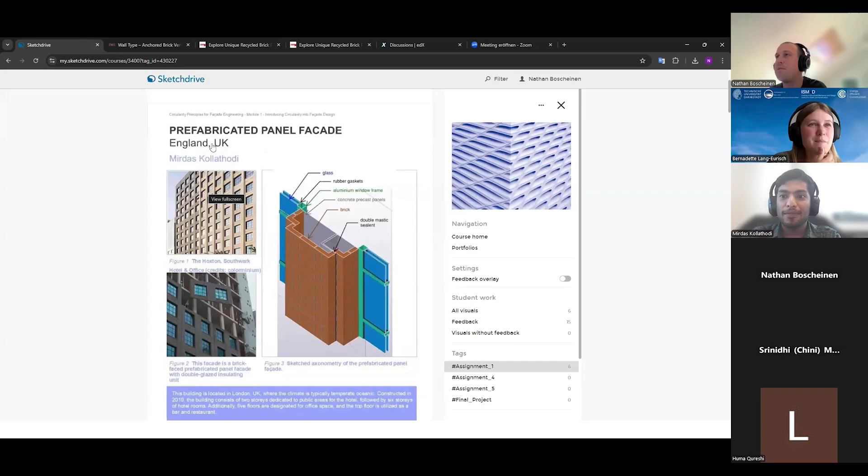This building is located in London, and I think Nathan already shown a good video from the Columinium website, the window contractors for this project. If anyone else would like to see the video, it's in the sketch drive as well, in the comments. It's pretty interesting.

Thank you, Mirdas, for your interesting prefabricated project. Of course, you don't need to share the details, but you can also share different drawings if you want to. I understand that sometimes we can't share everything that we would like to share.

I think it's very interesting because especially prefabricated modules can support circularity because of the potential for demountability, and they allow for controlled reuse. So you're not just recycling the small materials, not just the single brick, but maybe you can reuse the whole facade plate in a different project. This is quite interesting, but it depends on the future use for the new project and the quality of the modules. And of course, how are the modules mounted and connected to each other? Can you maybe share a little bit about that?

I'm sorry, I'm afraid I don't have permission for that. Okay, it's fair, then we're just going to talk a little bit about it. That's totally fine.

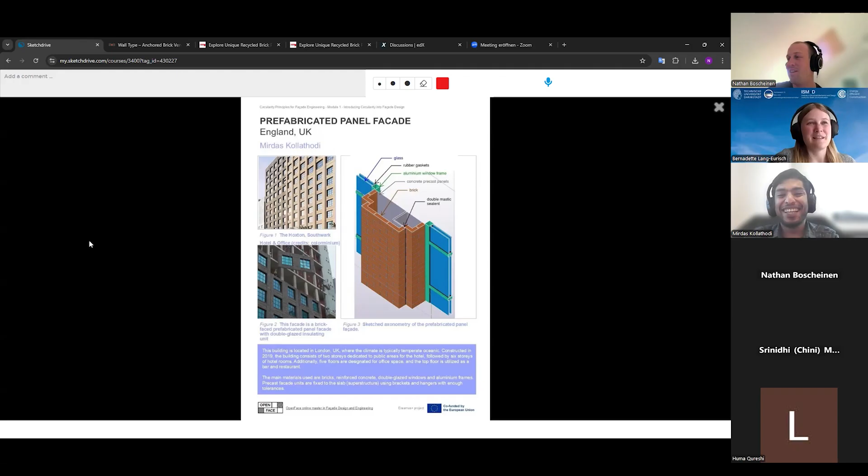Like I said, I think it's a very interesting project to see how the whole system can be reused. Just one thing that I noticed, I really like the project. With the brick, don't forget there's also mortar included, so if you want to reuse the brick, you need to probably detach it from the mortar. Just a slight note that I noticed.

I think I can add something to that. We already use this if the project is big and we are only showing one side of the brick, then we will cut the brick into two so we can use both sides. The whole brick we can cut into two and we use it.

Cool, like a brick slip system, would it be called, or something like this? Cool, they're quite big panels. Yeah, very heavy. Cool.

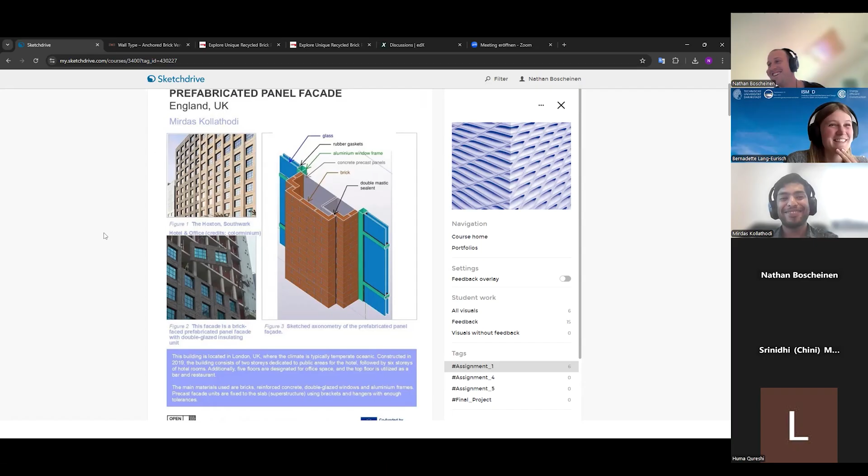Thank you, Mirdas. Nathan, did you have some comments or thoughts? I just said from a disassembly point of view, it's quite interesting as the whole panel with precast concrete is tricky, but as Bernadette said, when you have the full panel, you can reuse the whole panel, and it's relatively perfect. That was the only comment I had, and just how big the panels are is quite amazing.

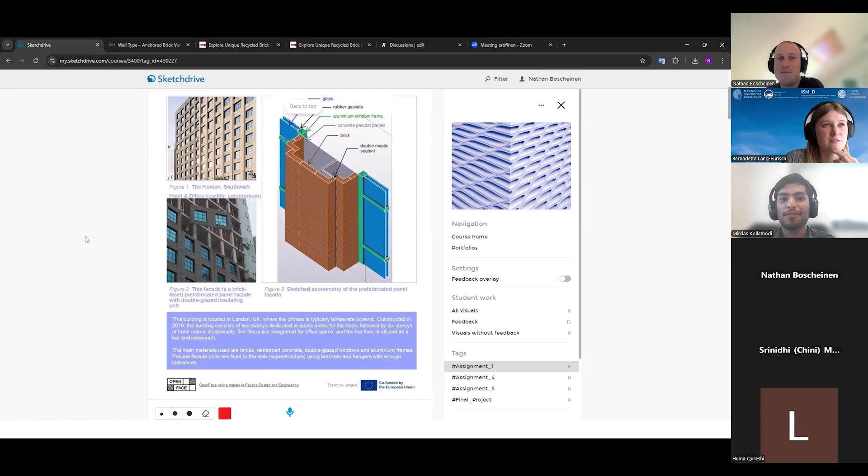And then maybe we can go into different business models, like renting a facade and things like that come up. But I think this is a video for later on, maybe I'm spoiling some information already. Then maybe move to the next project before I say too much.

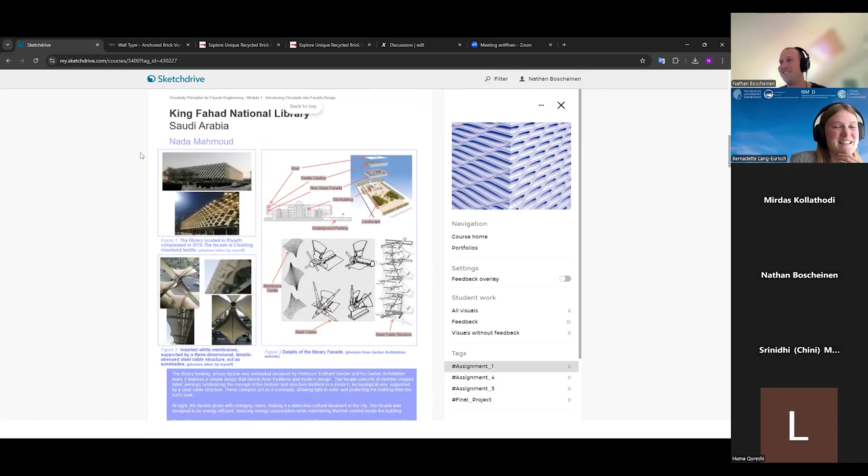But thank you again, nice project. Oh, and then another one, very interesting design. Nada Mahmoud, are you here? Maybe I can look into the names. I also can see them.

Nathan, do you want to maybe do a quick summary and then I can share some thoughts? Well, Nada has posted this relatively interesting building. It's pretty bespoke, in Saudi Arabia. It looks like from the drawing they've got the old building, the old heritage library in the center, and they've completely encapsulated the building within another building by the looks of things.

So it has an entire glass structure behind this textile facade. My only question to Nada was whether the textile was purely a sun shading element or if it had some ventilation function. I'm not sure if the glass facade behind is completely sealed with mechanical ventilation, or if it allows airflow through the building. I wasn't sure, but from an architectural point of view, it's a very interesting building.

Yeah, but I liked that you pointed out... oh, someone unmuted him or her. I was just thinking out loud, given that it's in Saudi Arabia and I grew up in the Middle East, I think it would be pretty unlikely that it would allow external ventilation, just given the climate. But probably the shading is a major benefit.

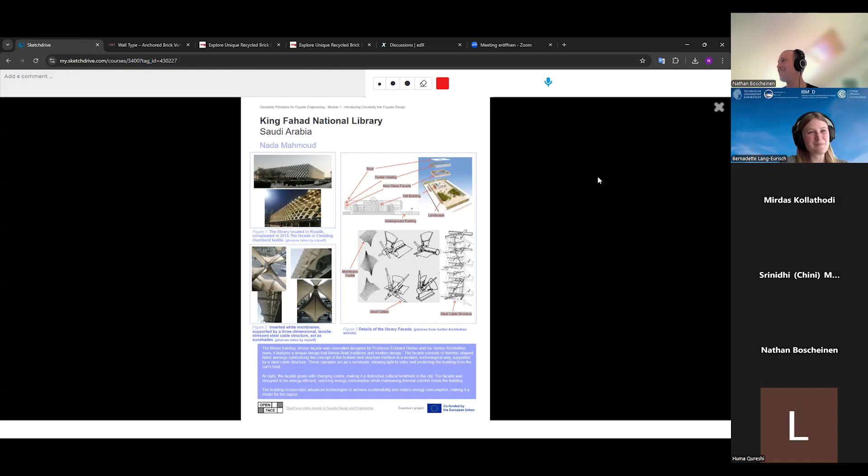Maybe Nada has the answers in her next assignments. Hopefully, yeah. We don't want to spoil anything, but you'll probably see this building again. I don't remember if there were any other questions in the comments. No, that was basically it, I think.

I wasn't too sure what the exact textile material was. I tried googling it quickly but didn't find an answer besides that it's textile. But textile can mean anything. Still, it was very interesting.

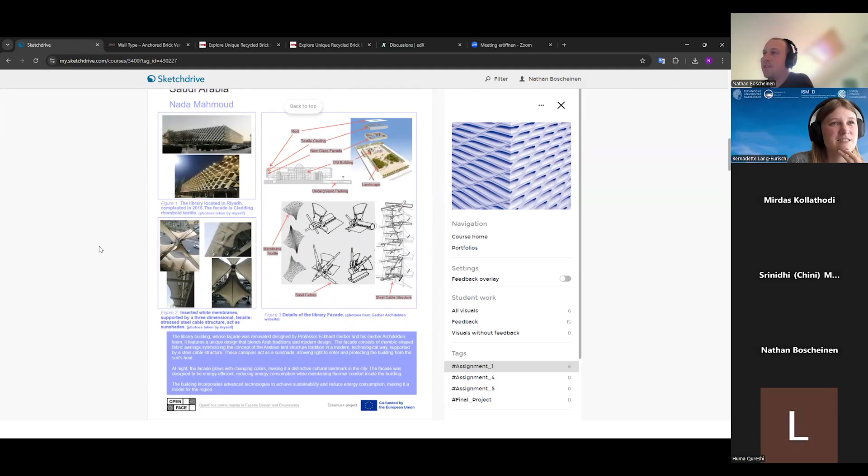I like that they haven't touched the old building and left it in there as well. Sometimes you don't need to replace the whole building, sometimes you can just build a building around the building. I think in module 4 we'll have an example about this concept, with Irving. I'm giving too many spoilers.

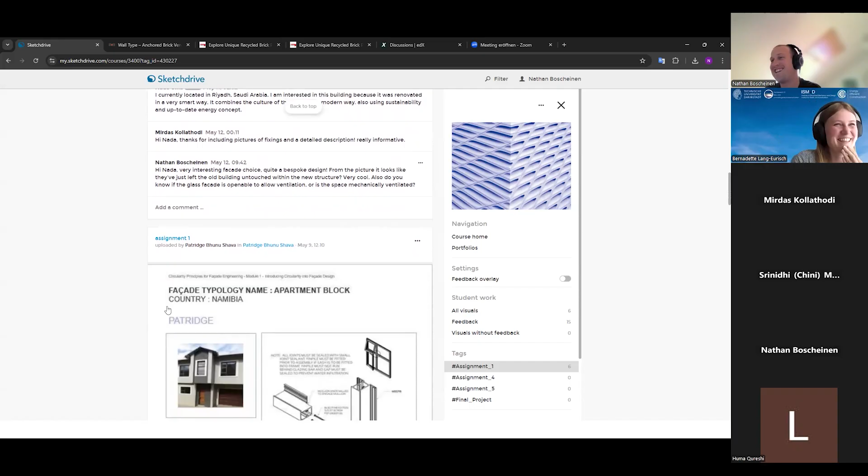Let's go to the next one. This next one was from Patridge in Namibia. Just gonna have a quick glance. I don't think he's present, so maybe we can talk about it again. I've also just realized the question I asked was relating to the cladding, but it's answered here, so I can ignore that question. In German we have a saying: if you can read, you have an advantage.

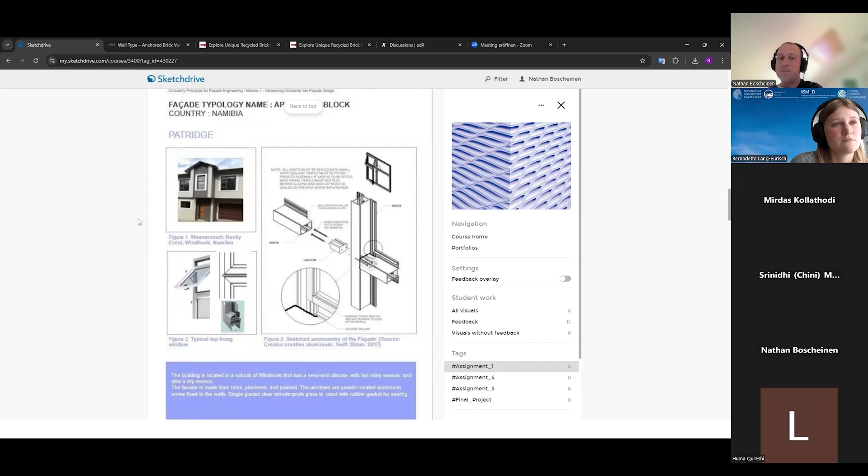Matteo had the question: are you aware of different materials that were added to this facade because of the semi-arid conditions or rainy seasons, that would differ from other similar constructions? I don't know, I'm interested to see the answer. I couldn't think of an answer myself. The only thing I thought was that the frame itself is not a thermally broken frame, which isn't the best for thermal performance, but maybe the issue of dew point and moisture isn't such an issue in a drier, warmer place than Germany. That was the only thing I could think of.

To be honest, I would have wished that Patridge would be here, because I have some questions, as it was a bit hard for me to read the text.

And I also had questions like which sealant was used, because depending on which sealant, is it recyclable or not recyclable? And also the question regarding... can you scroll down a little bit so I can see the question, or so the group can see the question again?

Of course, I can just speak for the European side. Yes, it depends on which material you use, and it depends on the durability of the material. If we're going into assessment tools like LCAs or material flow analysis, we also need to assess the time that this material can still provide its function in the facade. It totally depends on the outer circumstances. If you have a high humidity rate in the outer climate, your material will be different after 20 years than if you have a drier climate. So this is one thing I'm thinking of when I see a question like that - it depends on the time the material can still provide its function.

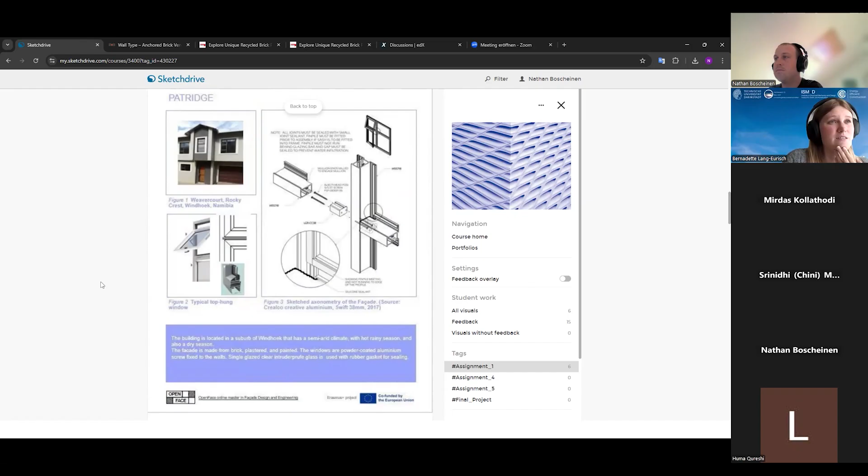And yeah, I'm sorry, I had a little bit of difficulty reading the text. But I will probably write a comment about that, and maybe Patridge can answer that in the assignment.

Cool, continuing on. I think you're here, yes? I am, yes - Chini, is it? Oh perfect, yeah it's Chini. Cool, if you feel like it, hi, you can talk about this project if you want to. Yeah, well, I'm partly disappointed I didn't put in a project that my company is working on, because I think that would make for a much better final project.

But I took the assignment of visiting a facade locally far too seriously, so I reached out to my friend who's the architect for this building and got a bunch of details, because I also don't know how a sketch would have done justice to this assignment. Anyway, it's a fairly typical storefront with aluminum and glass and gaskets, so it's pretty similar to the curtain wall that my company works on as well. It's thermally broken, so I wonder how that will affect the recyclability of the glass and the aluminum - will it just be separated, or will it just kind of burn off when the aluminum is re-smelted? I don't actually know the answer to that. I focused a lot on the second assignment on aluminum and glass, in terms of the challenges.

But yeah, I think this is interesting to me because I feel like it's already designed for disassembly. If you take out the gasket and you take out the glass, you can disassemble the whole frame. So I'm interested to see what other improvements can be made to the system.

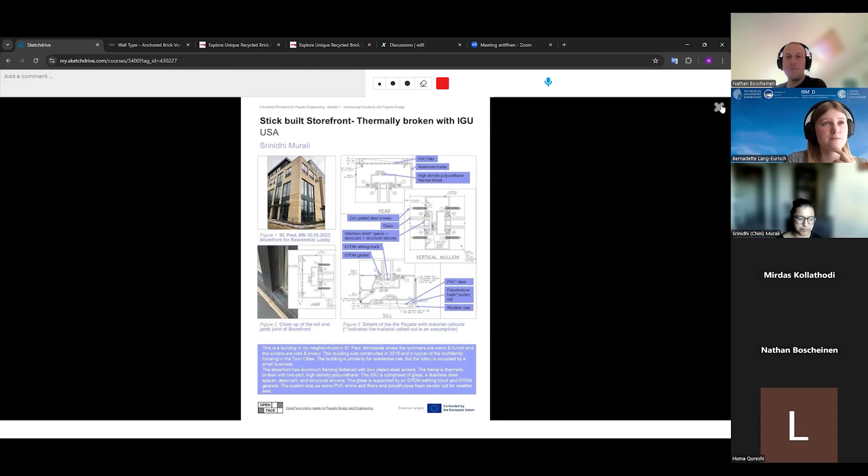Cool, any more questions? Doesn't look like it. But thank you for your submission.

I think there was a question about shading devices inside, which was answered on the inside. But we can continue on for time's sake.

This one was from Dónal. Here I had the same question like the one project before, something about the silicone sealing and how it's recyclable. It's just something that I'm always thinking about - oh, just use silicone to seal it off, but then the question is, can you recycle it? Is it possible? In theory it is possible to recycle silicone, but because silicone has so many different formulations, you need a very selective sorting process, and it's not really feasible to do. If you have a very big project where you can gather the same formulation of silicone, maybe it could be possible, but you'd still need to find someone who can recycle that for you. This is something I always see in designs like that, and I'm always thinking, how can you recycle it?

Now I think I talked a lot again. Donal, are you here? I don't think he is. This project is very similar to the example we were going to use for our template, but we changed it. We originally had the Glass Competence Center facade in TU Darmstadt as our facade, but we thought it was a bit trickier to explain, so it's nice that he presented it in a very nice drawing for us.

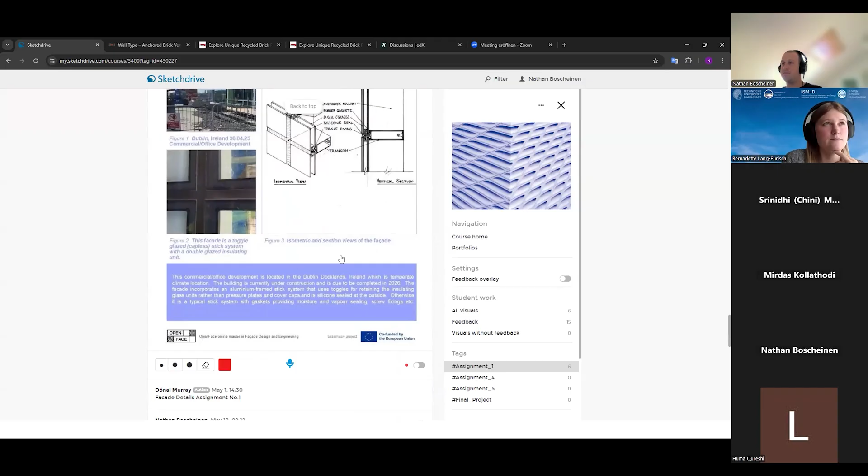I think we have one more from Matteo - the colorful one. I don't think Matteo is here either.

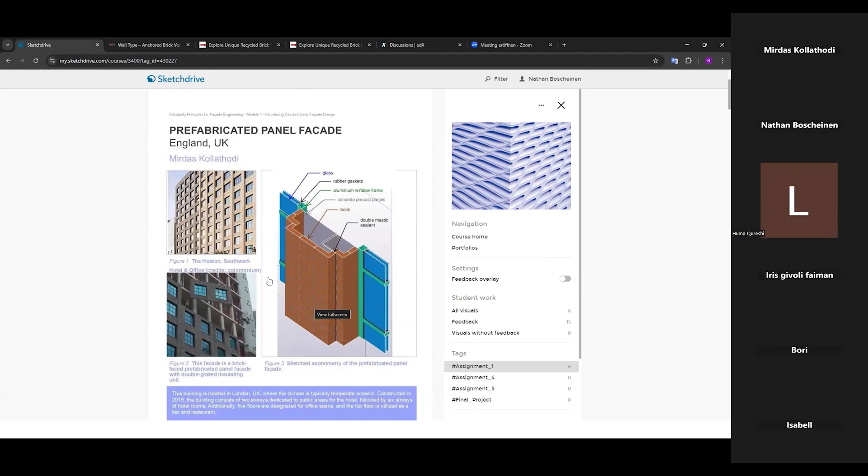My guess, I'm not too sure with this one. It's hard to tell, but I would imagine this is done on site. It can be both, to be honest. I think the example we had before at the very top, it's not the same method, but in some ways I would imagine similar, but it's done as a precast element.

But it's brick slip, so it's a little bit different. Here, I would imagine, because from this photo you can't see any visible lines to indicate there's a different panel, so my guess would be that it's done on site, and that they would go back to this detail, or have their cast in place concrete, fix this insulation as they go up, and then just connect these little brackets, as they go.

That's pretty standard - I think in module 3 we have the brick veneer as well, a similar concept where you would still put your fixing for the brick as you go up. You would do your lines of brick and then put another fixing in as you need, and there's standards on that - that's how I believe it would go.

But it could be both - you could do this as a precast panel, I'd imagine, and have something in, but a precast panel would probably be more... guessing here, but along the brick slip direction. Oh yeah, that's a good example.

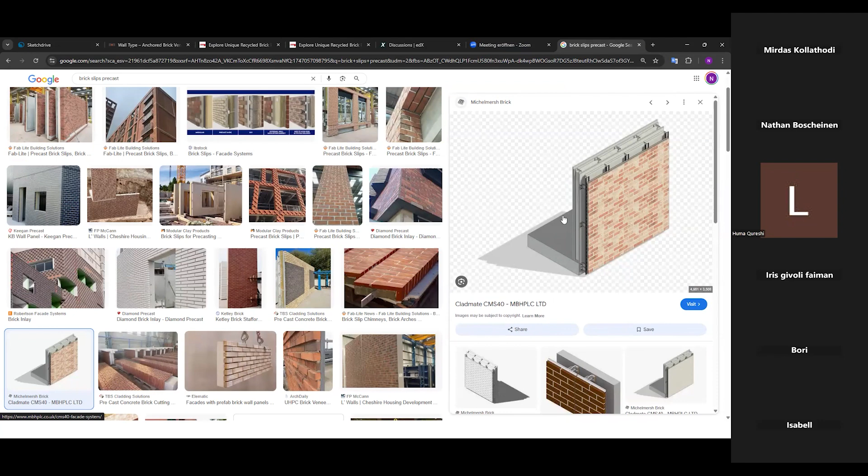Maybe this shows it - whereas we saw before, the bricks were cut in half into a small panel and sort of made as almost like a tile, I believe is how they work. I'm not too familiar with brick slip. I was just curious about how the dead load of the brick was considered - is it all dead loaded at the bottom, or were there intermediate spots? I was just curious, I suppose.

Yeah, interesting - it could, depending on how tall the building is, maybe be all at the bottom, but it could also, if you have a level, sometimes you can put - I don't know if lintel's the right word, I think it's the wrong word - but a support for each level, perhaps, is how you could do it on a larger building as well.

Yeah, very interesting. The other thing I found very interesting was the Netherlands seems to have a smaller brick to what I'm familiar with. In my experience with recycling bricks, it's often dependent on how hard your mortar is rather than how hard the brick is. When you're breaking the mortar off, you often just break the bricks unless you have special equipment.

So my question was how common recycling is in the Netherlands. I'm not sure, but I'd imagine it's quite high. It was just whether they have a lot of breakage cases, but even then, maybe you can do something new out of that.

It totally depends on what your function is afterwards. Of course you want to keep it in one solid form so you can reuse it for the same function and you're not downcycling. Don't you also have the brick pit example?

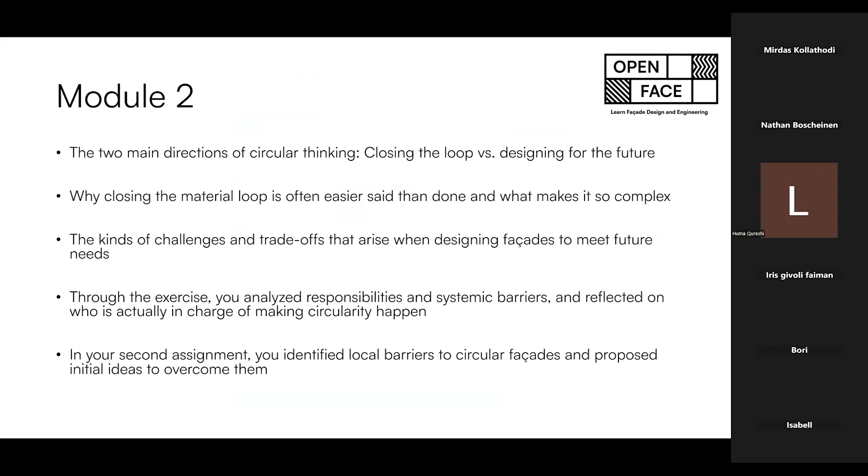Cool, so we'll discuss module. You'll make a comment on assignment two as a general note, yeah.

The general note, I already said it a little bit in the beginning of our webinar. We are aware that, for example, Nathan is from Australia and I'm from Germany, and we've almost only had experience with Eurocentric projects. So this is an opportunity for us to learn from you guys from around the world what is happening in different parts of the country.

Assignment 2 and Assignment 3 were especially for the challenges and circularity principles or projects that happen in different parts of the country, to inform us what happens in your country, but also to inform the other learners, because we are aware that we are teaching you a more Eurocentric way of building circular. But we want to be open-minded and see different parts of the world and talk about it with you and learn from you.

And then we learn from each other. That's always a good thing.

Do you have anything, Nathan? You're looking at me. No, sorry, I don't. I think it's been really nice so far.

It was really cool to see all the engagement in the assignment one Sketchdrive, and very nice to see these details. For instance, the detail in the US was something I was familiar with, but I haven't seen it since I've been in Europe, and it's interesting to see what details are used where and what systems are popular.

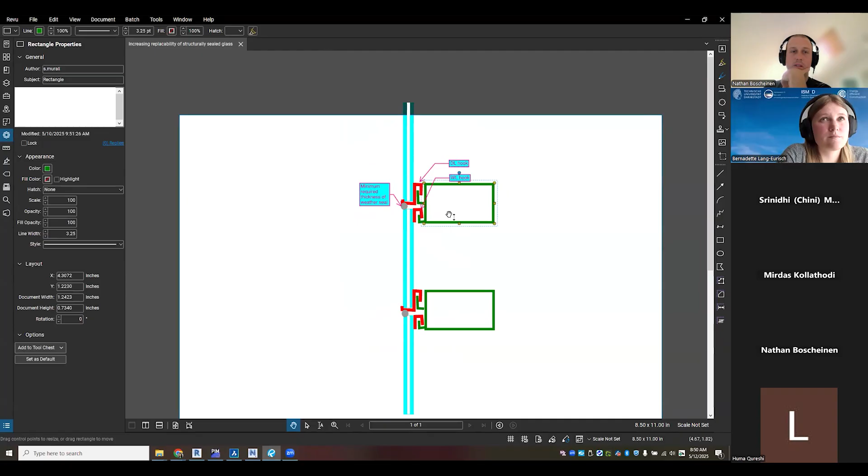It does, okay. So this was my thought on replacing the structural silicone. Actually, I was confused, Nathan, when you said the glass was structurally siliconed to the extrusion, because I had assumed it was. And I was wondering if we could somehow attach a dead load hook and a wind load hook to the glass and then have it hook onto the extrusion, with just a very minimal weather seal.

The more I've been thinking about it, I've been wondering if we could—let me change the color of this—instead of gluing this hook on, which would make it even more difficult, I do see handrail glass sometimes with these big bolts that go through the glass.

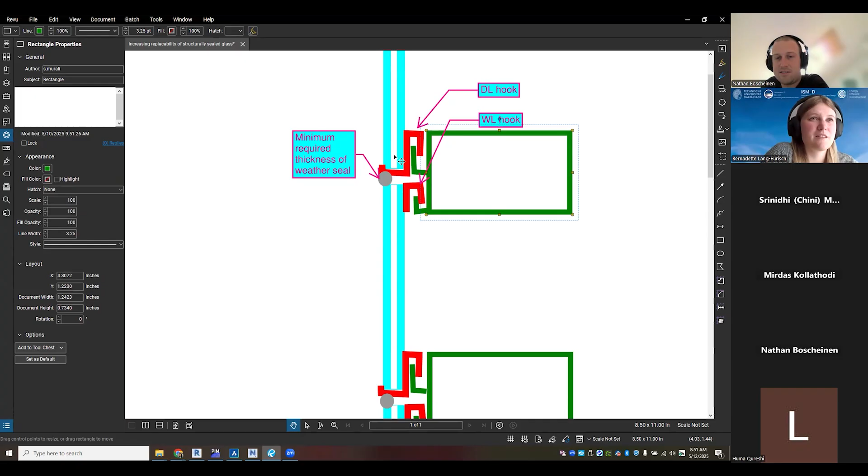But now I saw the gradual change, I saw it go from four-side captured to two-side captured, so it was kind of like a ribbon effect, to now every single project is structurally sealed. For the past 10 years I haven't seen one that's been captured.

Is it the same for me in Australia? Is it an architectural choice? It would seem that way, and now the big trend is big terracotta panels. So it's been interesting to see these trends, but as facade designers, if we could sell alternate solutions to architects or get them back on board.

I'm interested to know, is circularity much of a discussion within architecture and facades in your daily experience? It's starting to be, for me. It wasn't really in Australia.

The interesting thing is I just went to a circularity conference in New York, and one of the presenters, Lisa, presented on circularity, which was all about glass, and showed the same company that was presented in this course. And the person I believe it was you who interviewed, Linda.

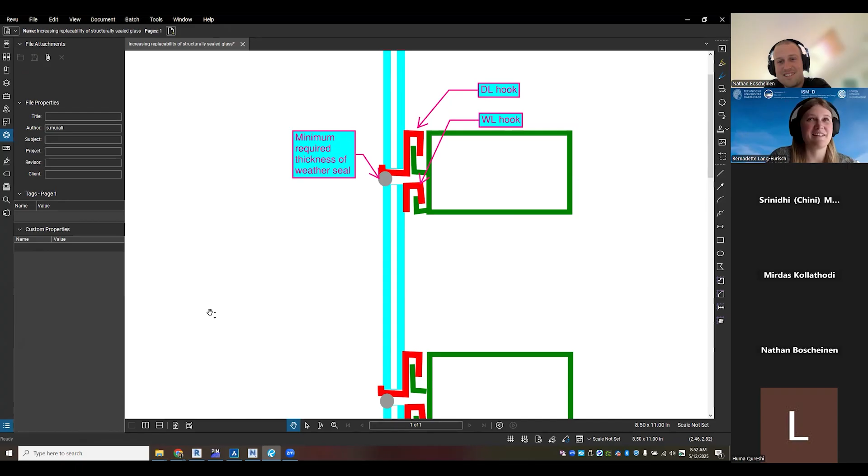Linda Hildebrand, yeah, I know them. It was quite remarkable to go to a conference, see Linda and the glass separating presented, and then come to this course and see the same person.

Lisa and Linda are very big in the German community, I'd even say the European community about circularity and glass. They're quite famous. Yeah, that was very interesting to see—what a small world, that is cool.

I think Lisa is in California, if I remember correctly. Linda is at the university in Aachen. Yes, Lisa's in California, correct. Lisa has worked as a consultant on many of our projects, so I'm very familiar with her.

That's great, small world. Yeah, but that's the fun thing about the facade world—like you said, Nathan, it's so small.

Very surprising, but also back to your detail—I don't know of any systems that are like this. That's not to say it's not possible or doesn't exist, but I've got no idea, I'm not too sure of systems. Maybe that's a nice thing to research. I'd be really interested to know, I haven't seen anything like that.

What I think of, I could be wrong, is Donald Murray's one in Dublin. I don't think it's structurally glazed—I think the toggle is purely the fixing with just a rubber gasket at the back. I could be wrong, but I believe that's what happened. How is the glass attached to the extrusion? Because it's a hand-drawn sketch, I can't quite tell.

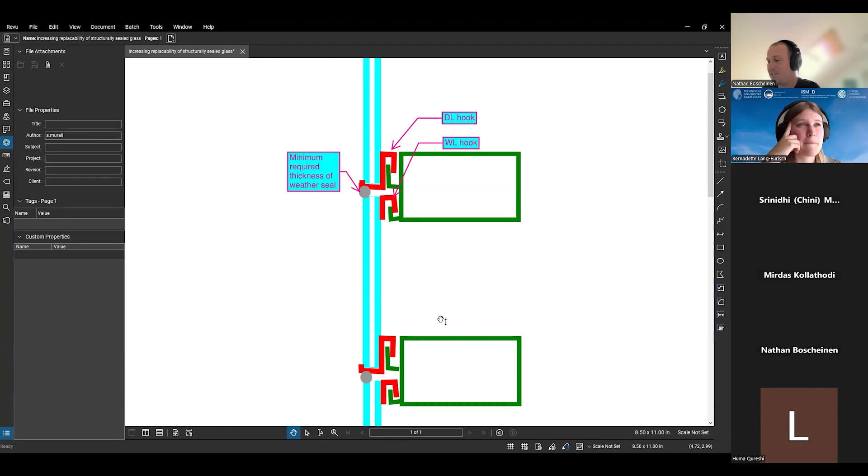I was trying to find... okay, the architects want to see only glass. Let's try and fit everything we can within the sight line and see how that would work.

I haven't seen anything like this either, this very crude sketch is definitely all mine. I think the toggle system works something similar to a stick system, but you have the toggle instead of a screw into the frame. So the IGU spacer has something to accept the toggle, and then it can't move because it's toggled into the glass. But I'm just trying to find a good photo.

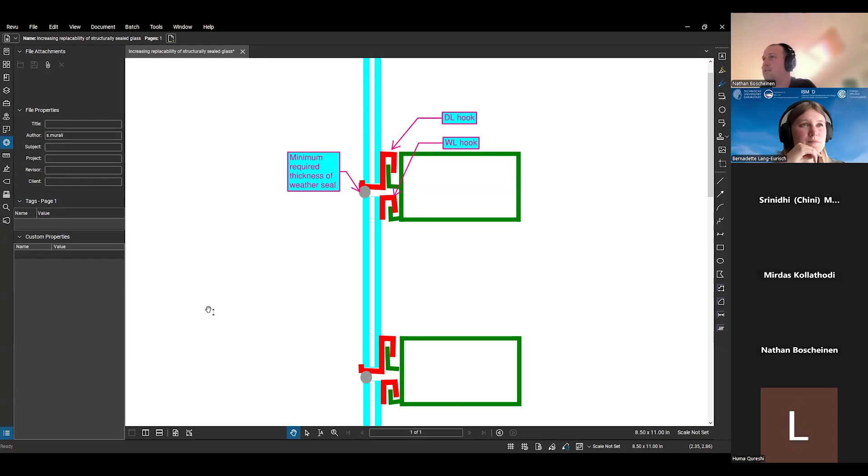Oh well, then there's already a solution. I mean, that's not to say you can't propose your own, because the one as well looks pretty interesting.

Oh well, that's quite nice. I know I have in one of our lectures somewhere an area on toggle fixings. I'll find it and I can somehow get that into edX. I'm not sure where, but you'd just need that to talk about who did the picture. There's something for us on our side to figure out.

I believe it's probably purely going to be that the glass is in place and it's toggled, and that pulls the glass to the gasket, which creates the seal at the back, not enabling the glass to move out of where it is. So I believe that's how it works. The front is just a weather seal.

In this one here, I think this is just purely your front seal, and then the gasket at the back, once it's compressed, becomes your rear seal, I guess. Well, I think then I wonder if the weather seal could be replaced with a push-in gasket instead.

Yeah, exactly, maybe it's just an aesthetic choice. I'm not too sure, but if you could push in some gasket and have it fit, maybe it would serve the same purpose.